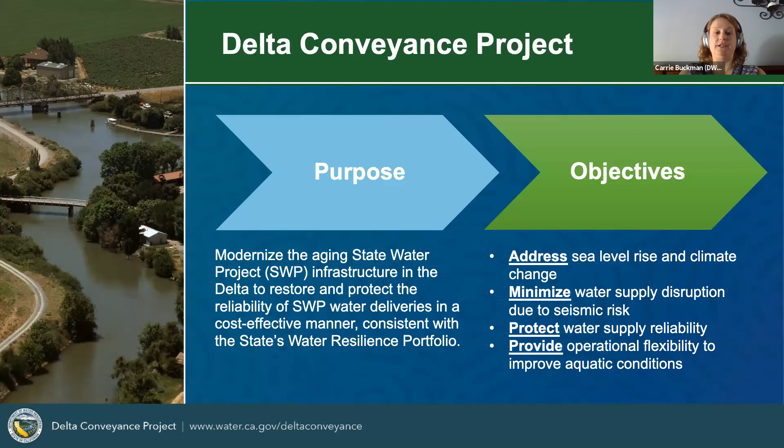The eastern and central corridor would terminate in the south at a new pumping plant that would pump water up into a southern forebay. And from there, it would travel into the existing Banks approach channel and through Banks pumping plant.

The need for that southern forebay is largely driven by the fact that there would be two pumping plants that would need to work together. And so there would need to be a regulating body in between to regulate flows. This Bethany alternative would only have one pumping plant, a new pumping plant that would pump water up into Bethany Reservoir. So without that need to regulate flows, we would eliminate the need for that large southern forebay, which is really sizable and has potential to reduce impacts.

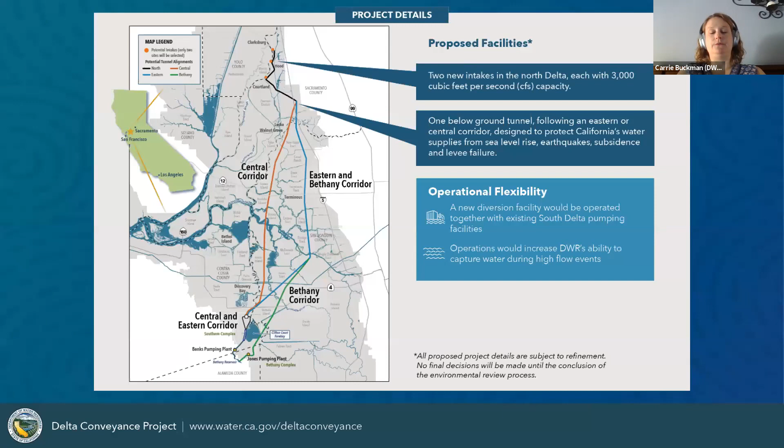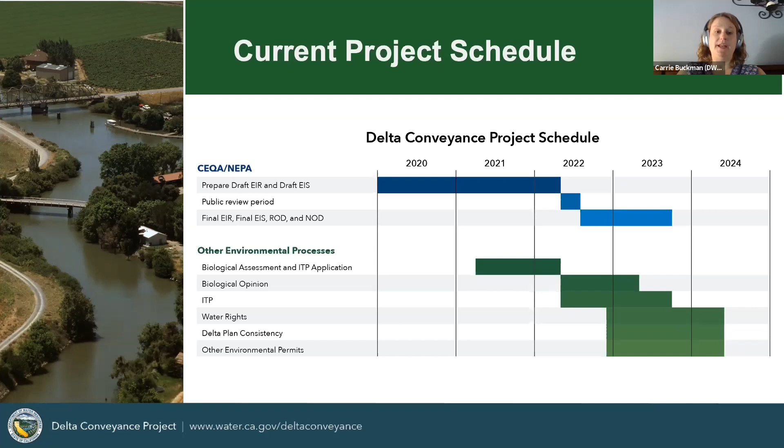We're looking at a public review period next year, middle of the year, and then working to finalize the documents and develop decision documents in late 2023. We're also working on a variety of other permitting efforts that will terminate at the end in 2024.

So now I'm going to talk a little bit about the overall CEQA process. Before we launch into this, I did just want to remind everyone that CEQA is a really long and complicated process, and we're really providing just a very brief overview here so that you'll understand the context that we're working in.

But I do want to encourage people who are interested, we do have a longer video that describes the CEQA process on our website. So that's there to provide more information. Tonight, I'm really just providing a little bit of context and foundation for the rest of the meeting.

CEQA is a requirement for all public agencies subject to the jurisdiction of California to analyze impacts of a proposed project prior to approval. So the idea is to evaluate what could happen to the environment in relation to the proposed project.

So the idea is to disclose potential significant environmental effects, identify ways to avoid or reduce significant environmental impacts, prevent environmental damage if feasible by requiring implementation of alternatives or mitigation measures, foster interagency coordination and public participation, and show that the agency is considering environmental implications of actions prior to making a decision.

So we are developing an environmental impact report under CEQA. And the purpose of that is to provide really a lot of information. It is a disclosure document to provide information about a project's potential significant environmental impacts and ways to avoid, minimize, reduce, or compensate for those impacts. The EIR will demonstrate that the environment is being considered and develop ways to prevent environmental damage if feasible.

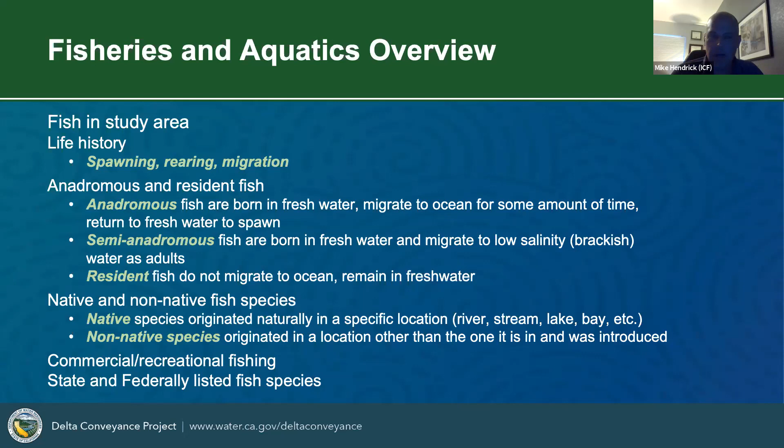Of the fish analyzed, some are state and federally listed. Examples would include spring run Chinook salmon and winter run Chinook salmon, while some are of commercial or recreational importance, such as, again, the striped bass.

The analysis will include an environmental setting. I'll be showing some slides on this a little bit later to give some more specificity for the Trinity system and the Central Valley. Analysis of impacts that could result from construction, operation, and maintenance of the project will be included. Proposed mitigation measures to reduce effects of potentially significant impacts will be included in the analysis.

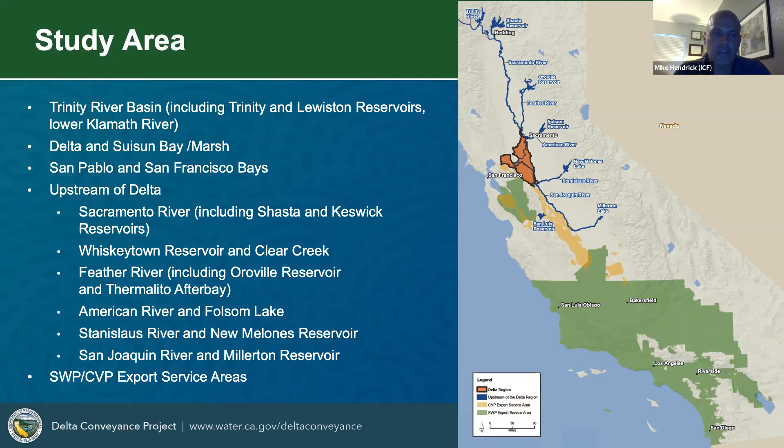So the species in the study area are selected for analysis based on importance, vulnerability, and potential to be affected by construction activities and changes in State Water Project and Central Valley Project operations to be implemented under potential project alternatives. Species of management concern will also be analyzed, and this includes species listed by state or federal agencies as endangered or threatened. Again, this includes examples such as longfin smelt and spring run Chinook salmon.

Also to be looked at are species of special concern as identified by the California Department of Fish and Wildlife. These fall into categories of critical, high, or moderate importance. Some examples of these include fall run Chinook salmon or late fall run Chinook salmon.

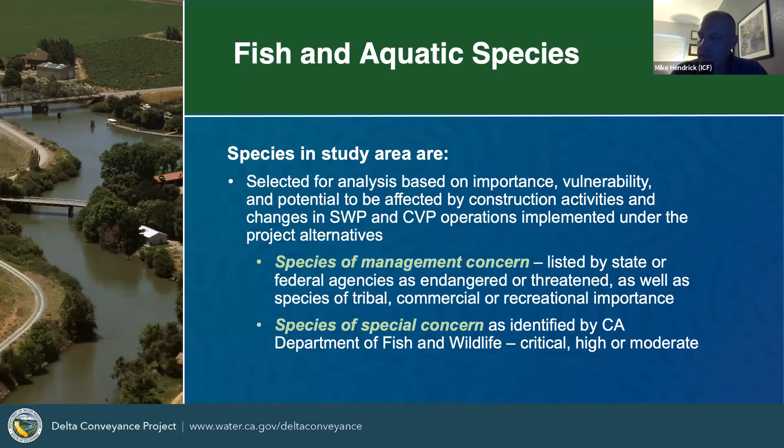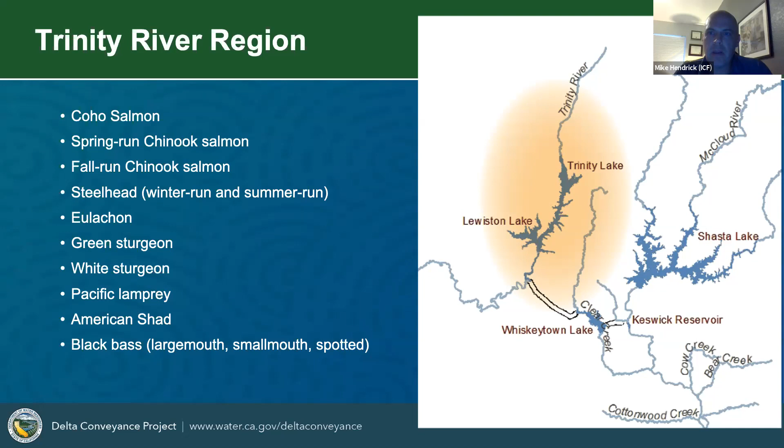I think the next slide focuses in a little bit on the Trinity River region. This is just to give the viewers a little bit better idea of this region and the species we might potentially analyze as part of the CEQA process. And the next slide, I believe, focuses on the Central Valley region. Same concept. The species that you see on the left are not necessarily all going to be analyzed, although most of them probably will, but these are the species that we are considering right now for potential analysis. These will be refined as the CEQA process moves forward.

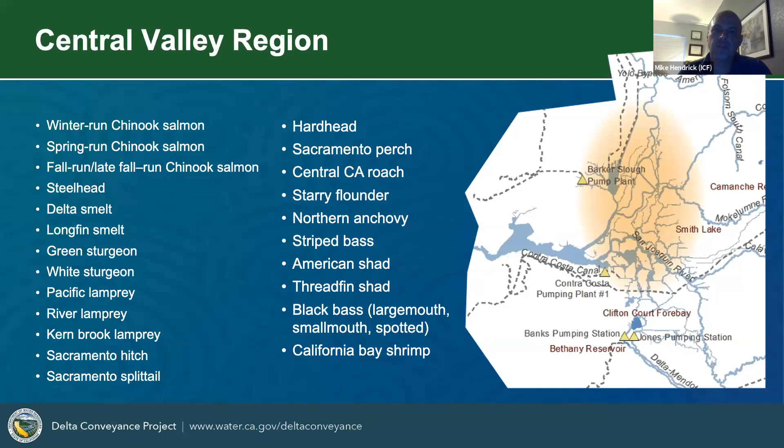Earlier, I had mentioned all species exhibit some sort of migration pattern. The ones that people are most familiar with are the salmon, recognizing that they are born in freshwater, migrate to the ocean, then come back to freshwater to spawn. This is the spring run Chinook salmon. I understand that probably not everyone can read the colors and what they all mean, but I do want to go over a couple of aspects on this slide in a little more detail. The black color is the historic range of this Central Valley spring run Chinook salmon.

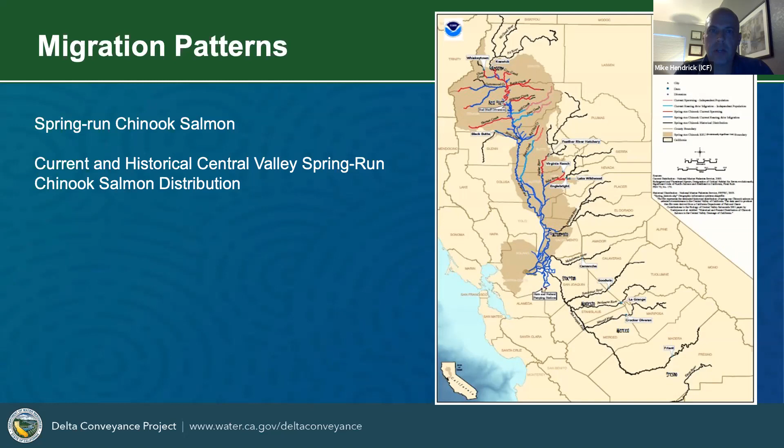The sort of dark blue is the current range of the Central Valley spring run Chinook salmon. And then some of the other colors, such as the red and the baby blue, show areas where they spawn. Again, hopefully people can read all those details. All the species that we analyze exhibit a life cycle of one kind. Again, we chose to highlight the Central Valley spring run Chinook salmon for this presentation tonight.

Spring run Chinook salmon initiate upstream migration in the Sacramento River during the spring months and into the early summer. Adults will hold in the Sacramento River watershed, including the tributaries, until the fall when they will spawn. And then the juveniles will start to outmigrate from the Sacramento River watershed. This means moving from freshwater down towards the ocean the following late winter and spring.

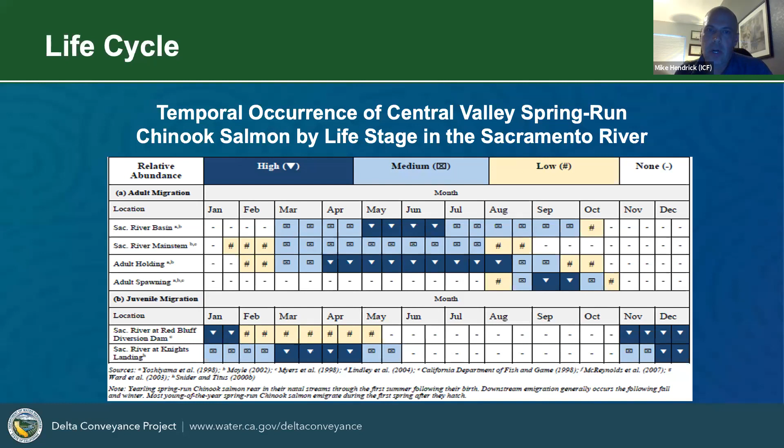And the next slide gives a little more specificity to this life cycle for the Central Valley spring run Chinook salmon for the Delta specific. Both the adults and juveniles are present during the late winter and into the spring. Adults are on their way upstream while juveniles are heading towards the ocean.

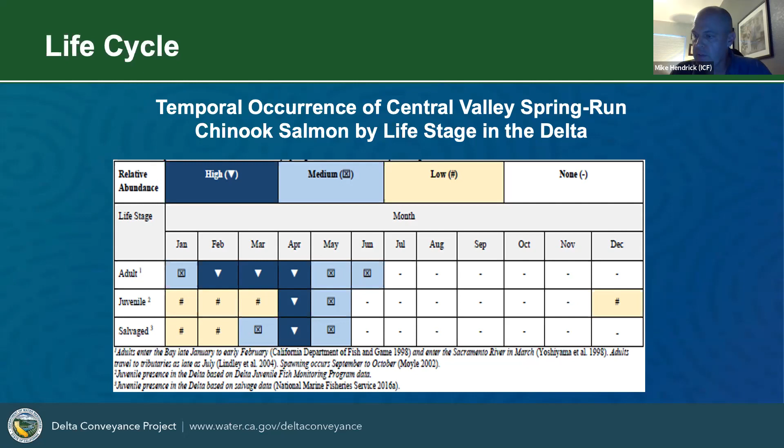Fish and aquatic resource analyses will be conducted both qualitatively and quantitatively. Quantitative analysis involves quantities, therefore numbers. An example would be numerical data that is available through various models, methods to estimate a potential effect of change, any type of change. This could be an operational change, etc. Qualitative data is descriptive, for example, area of origin for salmon, Feather River or American River. Qualitative data is generally used when numerical data may be less available and a determination of effect or change is based on best available information and best professional judgment.

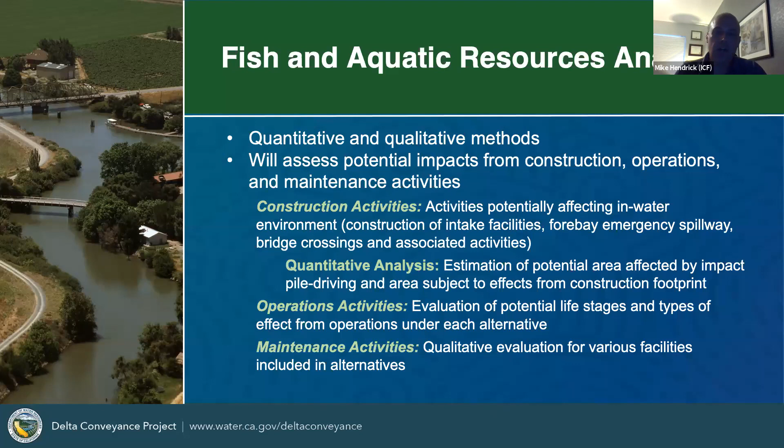As part of the analysis, we will be looking at construction activities that potentially affect the in-water environment. And this again is construction of intake facilities, forebay emergency spillway, bridge crossings, and other associated activities. This also looks at potential operation activities. We'll be evaluating potential life stages and types of effect from operations under each potential alternative. And there will also be associated and needed ongoing maintenance activities that will be evaluated.

Here is just to give kind of a basic overview of the draft EIR modeling framework. There are various models that will be utilized as part of the analysis. These models all require baseline information or input data. Examples include climate change hydrology, sea level rise, and there are a slew of others. This information forms the basis of what is known as CalSIM-3.

CalSIM-3 is a model that simulates operations of the State Water Project and Central Valley Project and associated infrastructure. CalSIM-3 plays a key role and is utilized as a base and as a foundation model for the development of additional models that analyze potential in-Delta and upstream effects to fish and aquatic species. And the diagram on your right is sort of a flow chart to give an idea of how this process looks and how any one model is dependent on others.

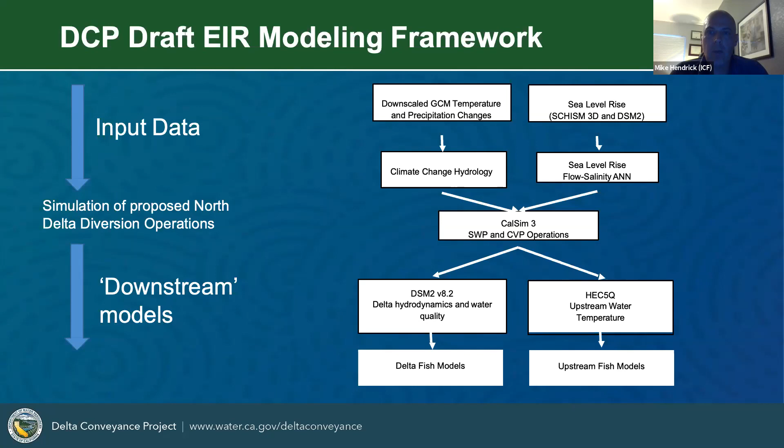Towards the end of the analysis for fish and aquatics, we take all the data that we have based on the above slides, and they're ultimately compared to what's known as thresholds of significance. These thresholds examples include, does the proposed project substantially reduce the habitat of a fish or aquatic species? Another example is, does the proposed project substantially reduce the number or restrict the range of an endangered, rare, or threatened fish or aquatic species? Thank you.

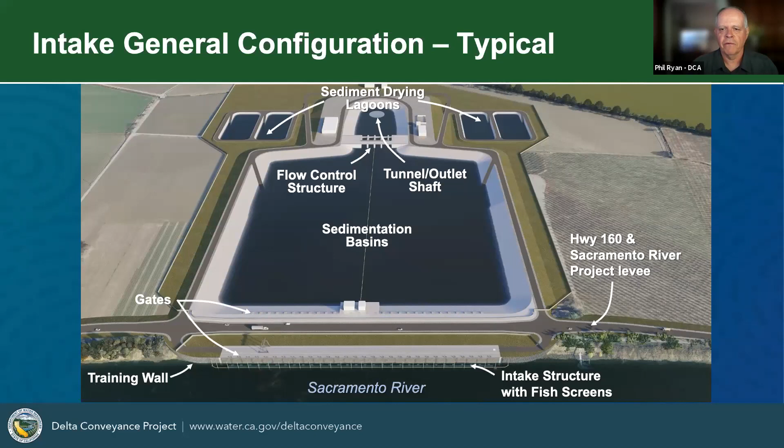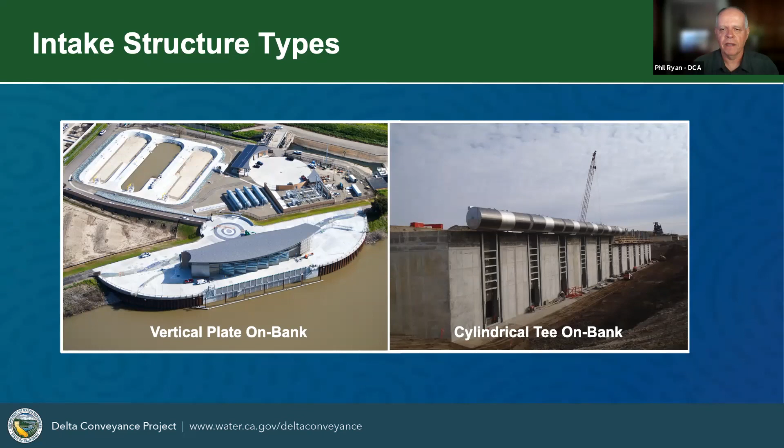And then a cylindrical T-screen system on the right. They're just two different types of screens. They're both highly effective and have both been shown to provide very high level protection to fish species at the intakes themselves. I'm going to go through each one of these to make sure you really have a good understanding.

So this is a 3D rendering of the vertical flat plate screen facility. The darker brown square panel at the bottom beneath the tan panels, that's the fish screen. There's solid panels above. So as water is induced to flow through the structure, it only flows through those darker brown panels at the bottom, flows into the open structure, and then flows through those box culverts you see into the sedimentation basins.

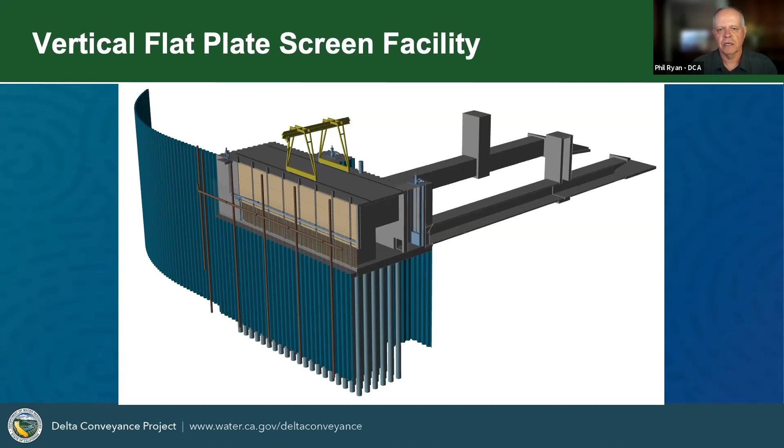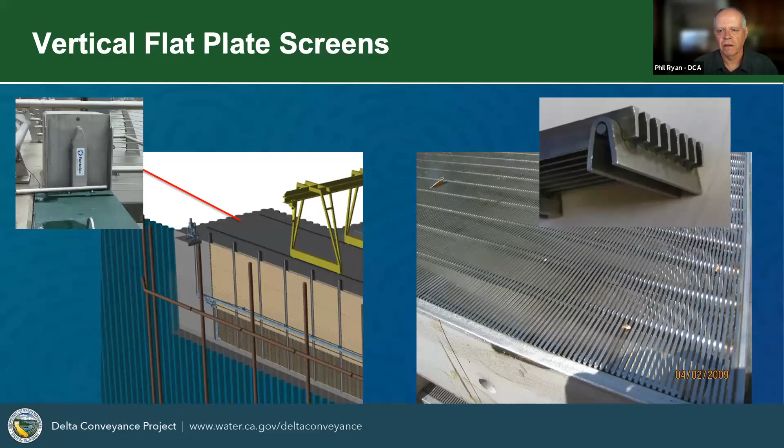So a little more of a close-up view of that. You can see again the brown panels at the bottom under the tan panels, and they slide in those gate guides you see up in the upper left photo there. So the screens slide down those panels and they sit at the bottom of the structure, and then the screen material you can see on the right. That's a screen material established by the regulatory agency suitable for salmonids and delta smelt and other juvenile delta species.

So these screens have to be cleaned because they grow mainly certain types of algae on them. That's biofouling of the screen. So they are swept on a regular basis, and they're periodically pulled up and cleaned off with high pressure jets. So on the left in the red dashed circle, you can see that's the screen cleaning mechanism. And that thing right down at the bottom over the brown panel is what's shown in white there in the middle. I like to call it a giant toothbrush.

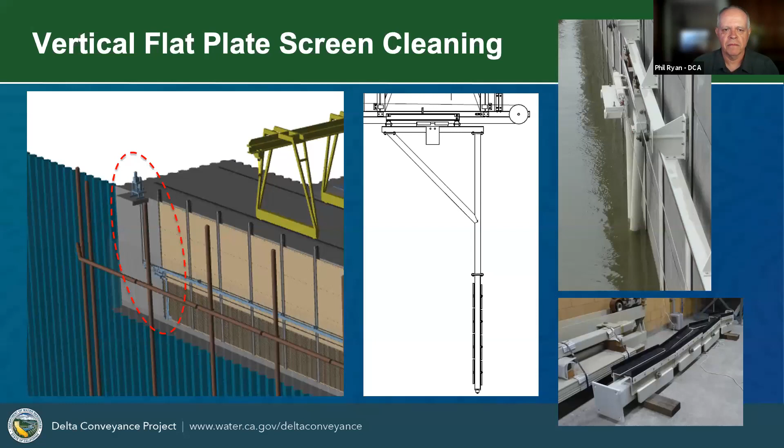The brushes are along the bottom half there. You can see a picture of those brushes down in the lower right. And then in the upper right, you can see how the mechanism is attached to the structure. And if you go back to the far left, you can see that facility kind of hanging down there over the brown thing. And that motor up on the top pulls a cable system that drives that brush back and forth. And there's a counterweight system to make sure the brush stays in contact with the screens.

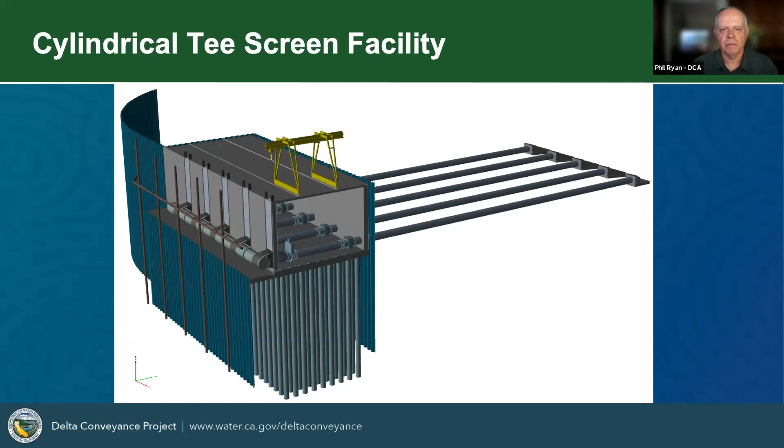Now, as opposed to that one, we'll switch to a cylindrical T-screen facility. Now you can see the cylindrical T-screens, they're at the bottom of the structure and essentially in the same location where the darker brown panels for the vertical plates would have been. Instead of flowing into an open structure, the T-screens feed directly into a pipe that flows directly through into the sedimentation basins.

Again, a close-up of that same structure, you can see most of the T-screens are in the raised position. You can see the one in the middle down in the lowered position. That's a during-construction photo of that particular intake. And then in the white on the left, that's the exact configuration that would be proposed for the Delta Conveyance project. Again, the screens slide down that same kind of rail system, and then they have solid panels above them so that flow only goes through the screens.

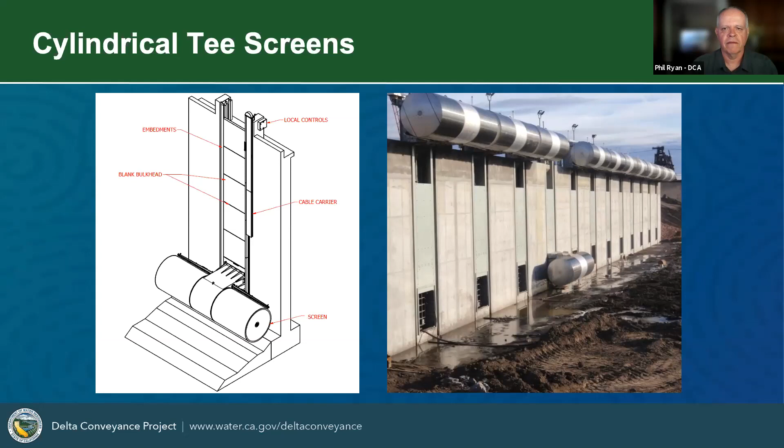These screens are cleaned in a slightly different method. There's a submersible motor inside the screens, and each side of the screen cylinders rotate. The brushes are fixed. There's one on the inside and one on the outside, and they rotate to keep the biofouling off of the screen material. It's essentially the same screen material.

You can see it in the upper right there, and you can see how good of a job these particular cleaning mechanisms do. Even that particular picture is in a screen that's fouled with invasive mussels, which are notoriously difficult for intakes. You can see what a good job the screen cleaners do even in that type of a situation.

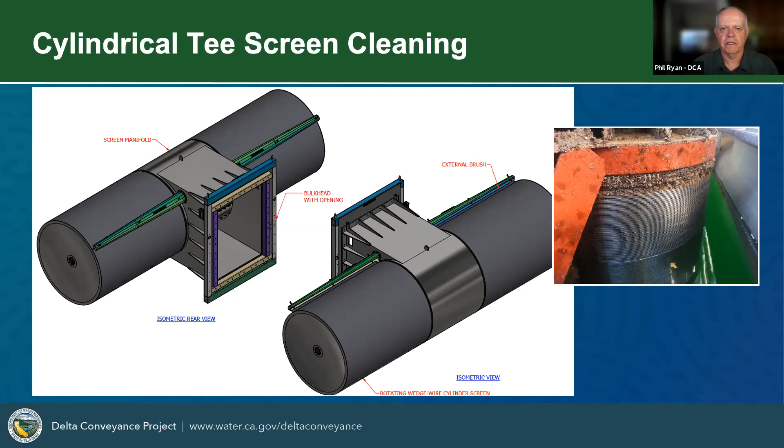So we did a comparison between the two screens, and like I said, they're both very effective. They're both used quite a bit, so you can't go wrong from a protection perspective with either of them. So some other things have to come into play in trying to decide between them. So the cylindrical T-screens result in a shorter structure due to the calculations that go into determining their length. You have individual flow control over each screen unit, so you get better flow control, so the control of uniformity and maintaining the exact required and allowed diversion rates.

Like I mentioned, they have better screen cleaning. Those brush systems in the rotation work better than the giant toothbrush. Because they're underwater, completely submerged, they really don't make any noise, so that's kind of a big advantage to them. And even though they do have motors in them, they are easier O&M because there's just less things to mess around with. And the motors are heavy duty motors and they are highly dependable. We don't have to jet sediment from inside that structure.

But as a slight disadvantage, they do protrude into the river, so there's possibly more debris collection and potential for damage. And then for those of you who understand refugia for fish management, as they pass the structure, you can provide refugia on these structures without adding length. Another interesting feature is the primary supplier of these types of screen is actually a manufacturing firm that is in the Delta.

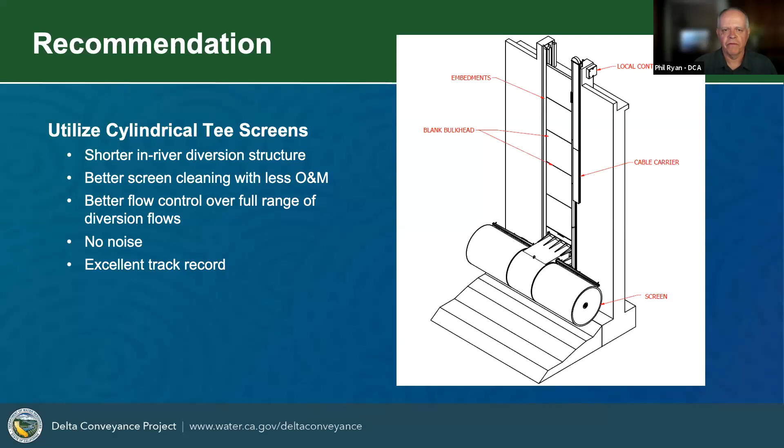So in summary, in evaluating all these, the recommendation is to utilize the cylindrical Tee screens. There's a shorter in-river diversion structure. They have better screen cleaning with less O&M to keep it that way. We have better flow control over the range of diversion flows. There's no noise, and they have an excellent track record in providing fish protection and actual performance. So that concludes my section to help introduce you to the intakes and the types of screens that were considered.

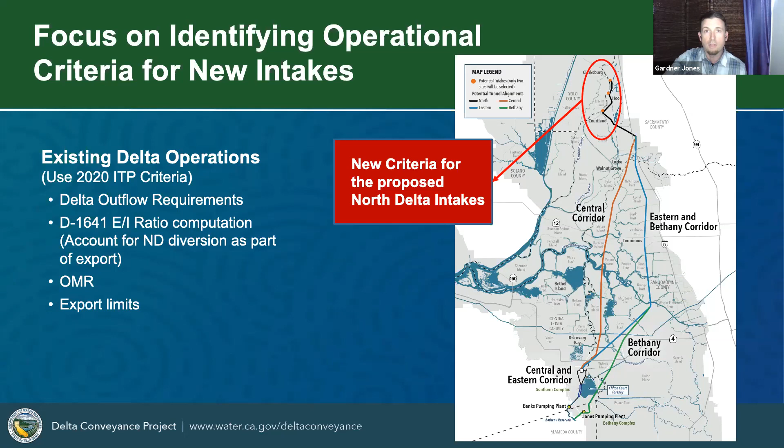And these are to minimize potential impacts on listed fish species due to Central Valley and State Water Project South Delta water operations. The most current requirements are based on the 2019 National Marine Fisheries Service and Fish and Wildlife Service biological opinions and the 2020 California Department of Fish and Wildlife incidental take permit for the State Water Project.

The new North Delta diversions, or NDDs for short, would operate in coordination with existing South Delta diversions. This is a concept known as dual conveyance operations. The potential flexibility in operations would be greatly enhanced by using either South or North Delta intakes.

Current assumptions for the dual conveyance approach are to use the NDD to augment excess flow diversions on top of the permitted diversions at the South Delta intakes. This would mainly occur in the winter and springtime period. The NDD would also be operated to manage salinity and realize potential carriage water savings, mainly in the summer-fall period. Overall, the goal will be to maximize benefits while minimizing impacts.

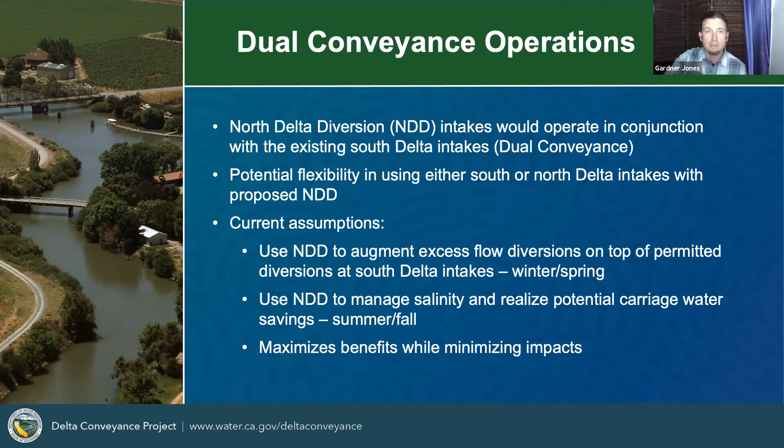Now for the proposed NDD operational parameters. Fish screen approach and sweeping velocity criteria are requirements on how fast diverted water can move into and past the fish screens, respectively. This is to minimize near-field operational effects on vulnerable fish. Bypass flows are proposed requirements on the flows remaining in the river and bypassing the diversions. This is mainly to protect survival of fish migrating in the intake reach and through the Delta.

Pulse protection is a rule intended to further reduce diversions during key winter flow pulses when larger concentrations of migrating winter run Chinook salmon juveniles have historically been shown to move down the Sacramento River.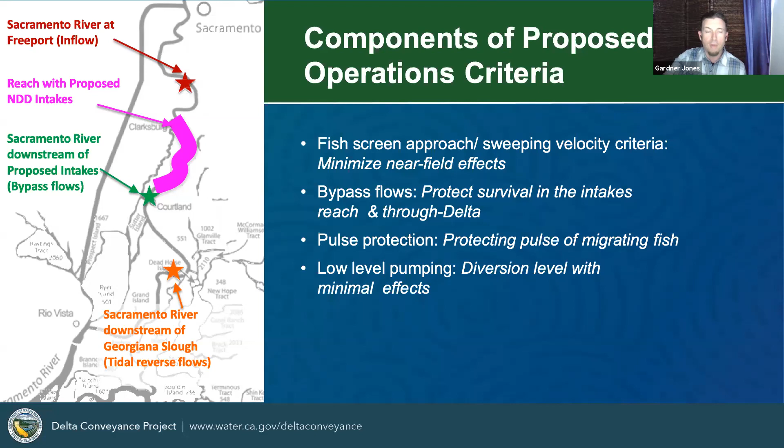Fish migration tends to be concentrated during a portion of the year, usually in the winter and spring, and is typically focused on short periods. For example, when young or juvenile Chinook salmon move downstream in response to environmental cues, like changes in flow and temperature. Hopefully this resonates based on what Mike presented earlier.

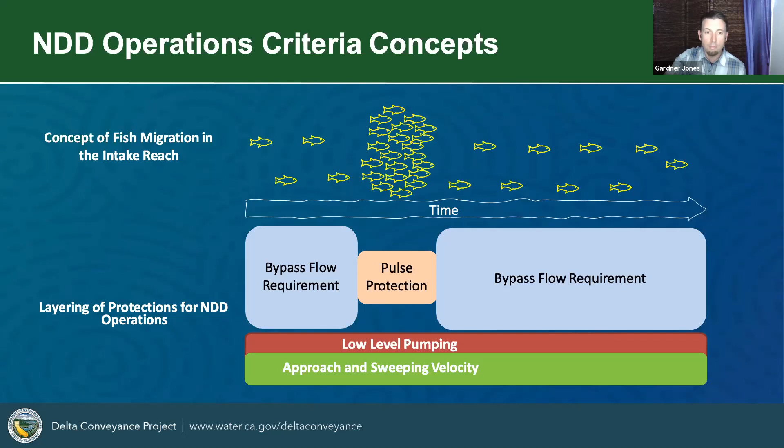Fish screen approach and sweeping velocity is really the first layer of criteria operating at the screens themselves. As noted earlier, approach velocity is the velocity of water perpendicular to and going into the fish screens. Sweeping velocity is the velocity of water parallel to and going past the fish screens. Approach and sweeping velocity criteria have been established by the National Marine Fisheries Service, California Department of Fish and Wildlife, and the U.S. Fish and Wildlife Service.

These criteria are to minimize potential harm due to entrainment, which is when fish are diverted with the water through the screen into the intake, and impingement, which is when fish contact and can be held against the screen through the force of the diversion.

The DCP proposed project currently assumes an approach velocity of 0.2 feet per second, which is consistent with criteria used to protect delta smelt and lower than the 0.33 feet per second criteria used to protect salmon fry in upstream locations. The DCP also assumes an average downstream sweeping velocity of 0.4 feet per second, or double the approach velocity.

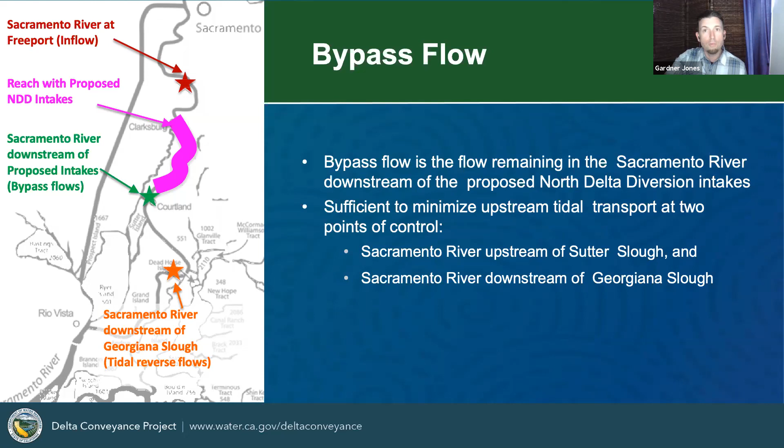So the figure on the left is a reminder of some of the key elements used to establish bypass flow criteria. As mentioned, bypass flow is the flow remaining in the Sacramento River downstream of the proposed North Delta diversion intakes. The criteria are designed to minimize upstream tidal transport, or the reversing of the river flow back upstream due to diversions as well as incoming tides, at 2 points of control: Sacramento River upstream of Sutter Slough and Sacramento River downstream of Georgiana Slough. These have been developed to preserve movement and survival of listed fish in the lower Sacramento River.

We have developed a preliminary set of bypass flow criteria. These criteria are used as input into the analysis of potential effects. We will then consider the potential effects and determine if any changes to the criteria are needed. The bypass flow criteria would identify a percent of Sacramento River flow that could be diverted at the new intakes. This percentage would increase as the Sacramento River flow increases. The predicted bypass flow would be determined based on daily average or tidally filtered flows.

In wetter years, fish tend to do well. Fish species native to our region, such as Chinook salmon and delta smelt, have evolved to take advantage of periodic conditions produced when there is more precipitation in the system. To allow for the idea that drier years should have more fish protection, the bypass flow criteria have 3 levels that change for drier or wetter conditions for the period when listed fish would most likely be near the facilities, which is December through June.

The criteria would change from level 1 to level 2 after 15 total days of bypass flows over 20,000 cubic feet per second, or CFS. The criteria would change from level 2 to level 3 after 30 total days of bypass flows over 20,000 CFS. And flows of this magnitude generally reflect the conditions associated with increased precipitation and typically occur in the winter and spring months.

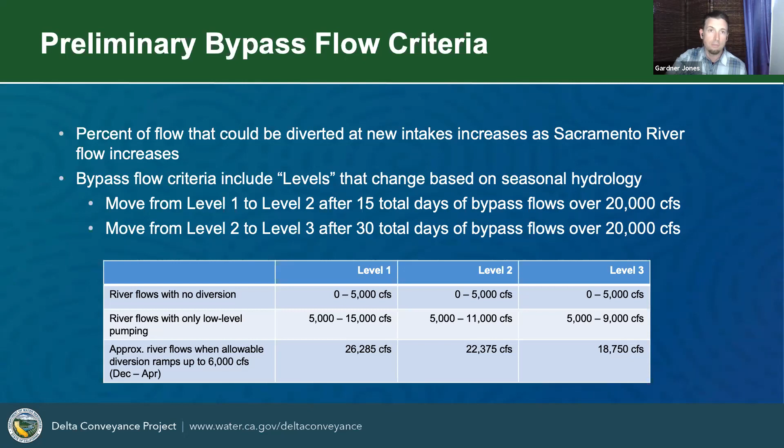Pulse protection is intended to provide an additional layer of restriction on the NDD when storm-driven flow spikes, usually in the winter months, occur in the upper Sacramento River region. There is evidence that large numbers of endangered winter run Chinook salmon begin moving downstream toward the intake reach in response to these storm-driven flow pulses.

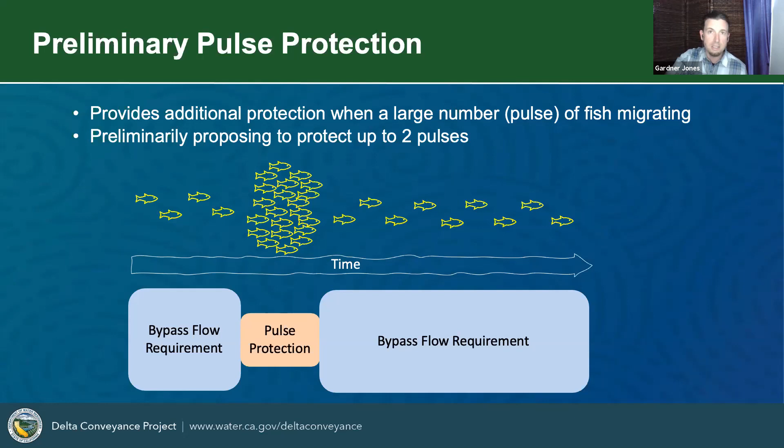Low-level pumping represents a diversion level with minimal effects to the river and aquatic resources. For low-level pumping, the DCP proposes from 0 or no North Delta diversions up to 900 CFS total diversions at the North Delta intakes, depending on flow conditions, with a diversion rate not to exceed 6% of Sacramento River flow. So for example, the low-level pumping maximum of 900 CFS could only be taken with Sacramento River flows at or above 15,000 cubic feet per second.